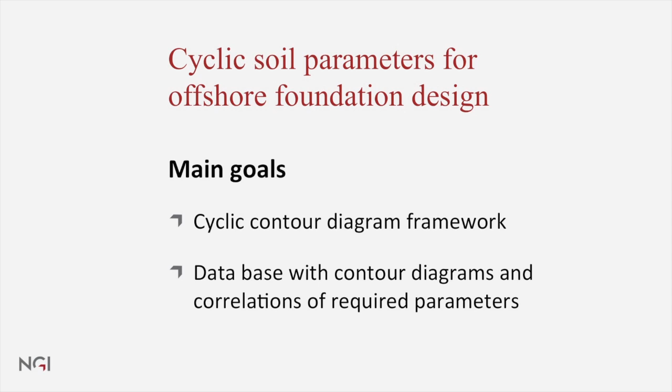The database contains contour diagrams for different soils - sand, silt, and clay - and it also contains correlations of static and cyclic shear strengths, and shear strengths with index parameters. The paper also contains correlations of non-cyclic parameters like static strength, initial shear modulus, friction angles, and consolidation characteristics.

This is the content of my presentation. I will start talking about when do we need cyclic soil parameters, what parameters do we need, how does soil behave under cyclic loading. Then I will explain the cyclic contour diagram framework, how the contours are constructed, what the important parameters are, and also a database with the diagrams and correlations.

I will then talk about how the contour diagrams can be applied in design, calculation procedures, slope stability or slope instability due to cyclic loading like earthquakes, and finally verification of the use of contour diagrams by comparing calculations with measured prototype and model test observations.

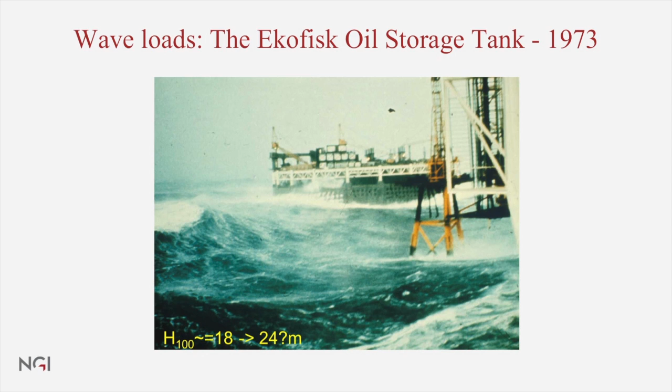So, when do we need cyclic soil parameters? My first involvement with offshore foundation design was in connection with the Ekofisk tank, which was installed in 1973. McClelland engineers were responsible for the site investigations, and they had significant experience from the Gulf of Mexico, and we benefited greatly from their experience at that time.

I did not have the privilege to meet McClelland himself, but I met many of the McClelland engineers, and that gave me a very good start in my career for the offshore work.

After the Ekofisk tank was installed, things happened very quickly, and we got into a very steep learning curve. Already 2 years after the Ekofisk tank was installed, 2 of the large condeep platforms were designed and installed. Also in that period, the industry saw the need to know more about cyclic soil behavior, and 12 industry sponsors initiated a joint industry project on cyclic loading on clay. That was the first joint industry project offshore at NGI, and we have had many more after that.

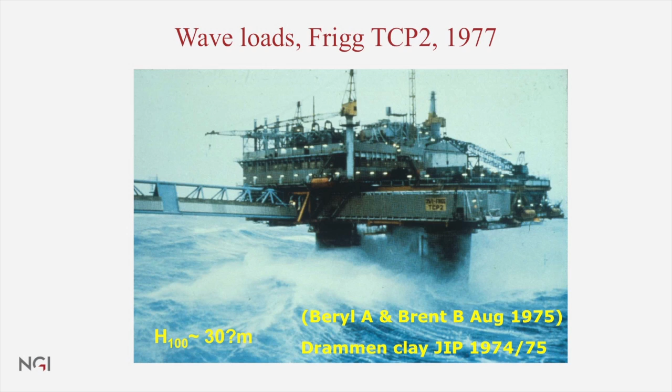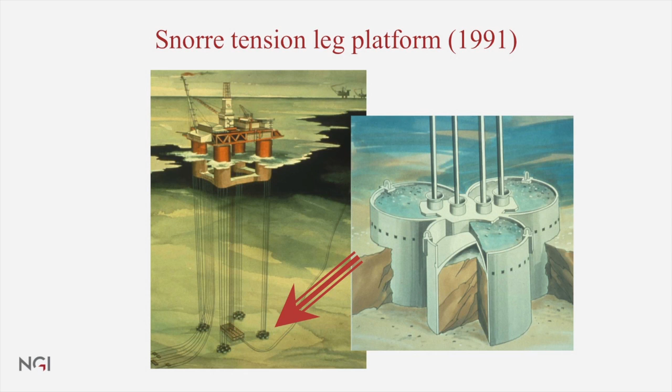But we need to know cyclic soil behavior not only to design the large gravity platforms, it's also important to know cyclic soil behavior in connection with other foundations, like foundations for TLPs, anchoring, suction anchors for other type of floaters.

More recently, it's also required in connection with the foundation design of wind power structures. They pose additional challenges, both because of the new, or at least partly new, type of foundations, but also because they are placed closer to shore. It means that we get into more complex soil conditions with more layering and varied soil - sand, silt, and clay of different densities.

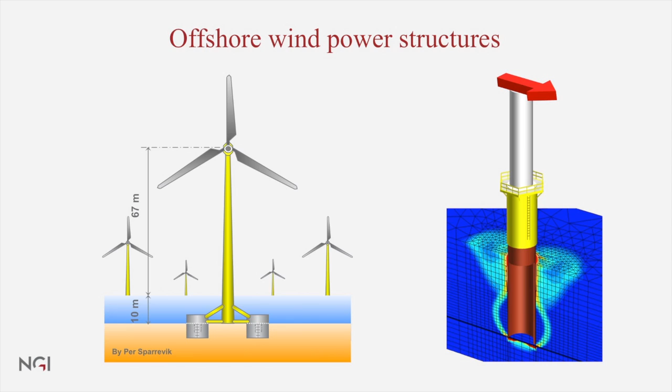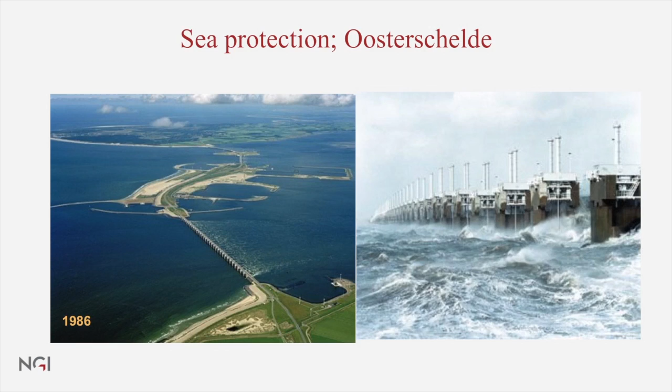It's not only offshore that we need soil parameters for cyclic loading. It's also in connection with sea protection barriers, coastal structures, ice loading from drifting ice, and this will also be very important, of course, if the industry goes into the Arctic.

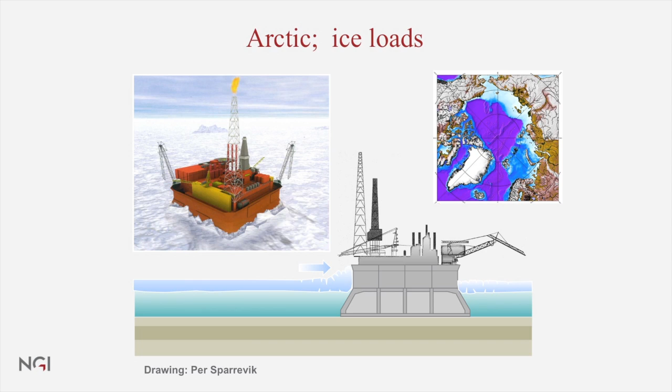Also in connection with earthquake, cyclic soil behavior is important, both in connection with the bearing capacity of structures during earthquake and also for instability that can be induced by earthquakes.

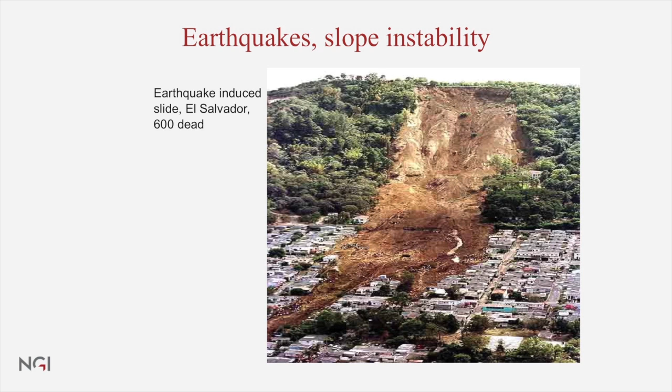In order to make sound foundation design for cases with cyclic loading, we need to address the topics that I've listed here. We need to determine bearing capacity under cyclic loading. We need to calculate cyclic displacements. We need to determine soil stiffness for use in global dynamic analysis.

We need to calculate permanent displacements due to cyclic loading, both due to dissipation of excess pore pressure that is generated, and also due to the increased average shear strains during cyclic loading. Soil reactions will also be influenced by the cyclic loads, which may cause redistribution of reactions. Finally, we need to determine how the static capacity is reduced by cyclic loading.

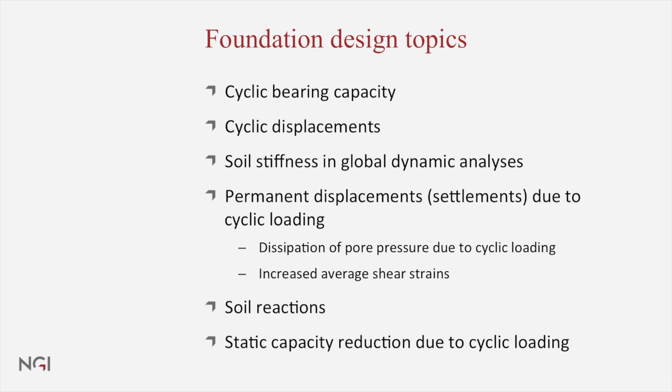So what parameters do we need in order to address these topics and to make design for this? We need cyclic shear strength, cyclic shear modulus, permanent shear strain due to cyclic loading, pore pressure generation, recompression modulus to calculate the volumetric strain when the pore pressure dissipates, damping, and static strength reduction due to cyclic loading.

All these topics are covered in the written version of the paper, but today I will concentrate on the 4 first ones.

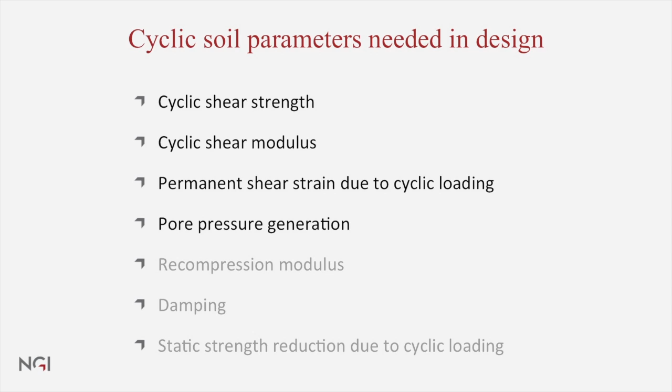Before we determine the soil parameters, it's important that we understand what is happening to the soil when it is subjected to cyclic loading. I've illustrated that here by an effective stress path, which shows the behavior for a test with monotonic loading on a contractive soil. This is undrained behavior.

You see that the stress path will go like this. It will reach a peak, and then it will reach the failure envelope, and it will then experience strain softening as it's going down along that failure envelope.

For cyclic loading, where we cycle with the cyclic amplitude around an average shear stress, we also start here, and during the first quarter cycle we go up here. But when we then reverse, we get an effective stress path that forms a loop. And this loop does not close. So it means that after one cycle, we have generated a permanent pore pressure.

And this pore pressure will accumulate or increase with number of cycles, and we move to the left in this diagram. The effective stress path will finally reach the failure envelope, and large shear strains will then develop.

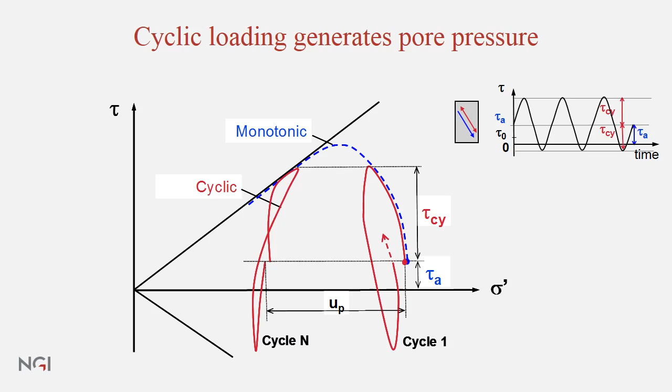This is illustrated in another way in this diagram. It shows how the pore pressure develops with time. As I said earlier, that pore pressure will increase with number of cycles, and therefore also with time, both the cyclic amplitude and the permanent pore pressure.

This means that the effective stresses goes down, and therefore the shear strains will also increase with time. Both the cyclic amplitude and the average shear strain and the permanent shear strain.

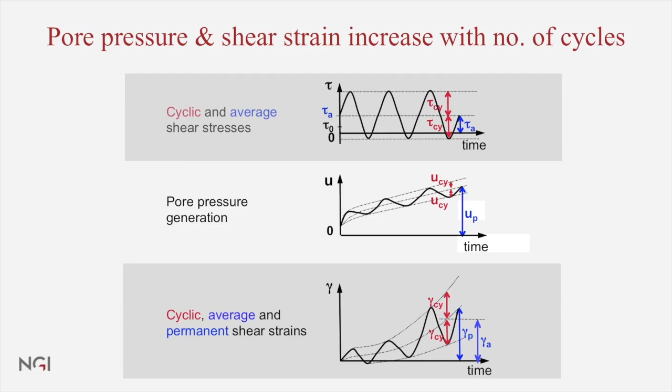I explained these components more clearly in this picture. This is a stress-strain behavior after the first cycle and after a cycle N. The cyclic shear strain is then defined as half the difference in peak-to-peak shear strain. And the average shear strain is half the sum of the peak-to-peak shear strains.

The gamma p is the shear strain that will be there when we have completed the loop, so that after we have completed the cyclic event, we will sit with a permanent shear strain, gamma p.

We need these shear strain components in order to calculate cyclic displacements and the soil stiffness for dynamic analysis. We need gamma cyclic for that. We need the sum of gamma A and gamma cyclic in order to calculate the total or maximum displacements. And we need the gamma P to calculate what the shear-induced displacements will be when the cyclic event is over.

These do not describe what is happening within the loop, the details of the loop, but we have developed a model where this also can be described, and that's described in a paper to this conference by Amir Kaynia and myself.

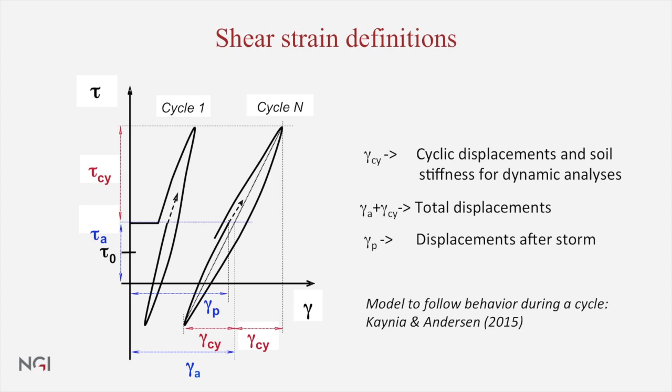So, in order to determine these components, we need to perform laboratory tests. This shows the results of 3 such laboratory tests that we run in order to determine these components.

The first one is a cyclic simple shear test with symmetrical cyclic loading. And you can see here the response. It's a reasonably symmetrical cyclic shear strain development. If you perform a triaxial test, also with symmetrical cyclic loading, you will see that the behavior is different.

We get relatively large cyclic displacements, but in addition, we get a permanent or an average shear strain, which is of the same order of magnitude. And it's also going to the extension side.

The reason why it's going to the extension side and that it's not symmetrical is that the soil behavior is anisotropic. The extension strength is lower than the compression strength. So with a symmetrical cyclic loading, we mobilize a larger part of the strength on the extension side than on the compression side. And therefore we get this non-symmetrical behavior.

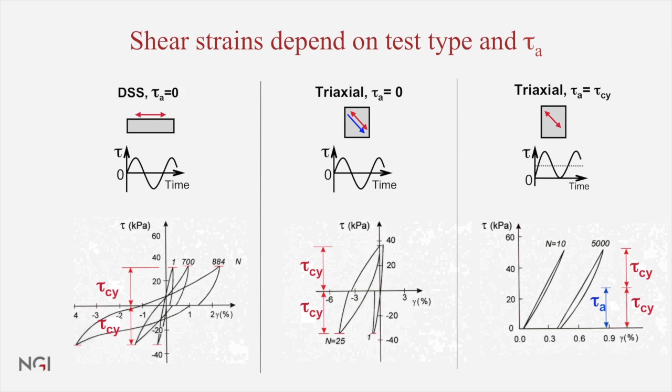This shows another aspect. It compares triaxial tests which have been performed with the same maximum shear stress, but with different amplitudes. And if creep should be the explanation for the development of shear strains during cyclic loading, the amplitude shouldn't mean very much. But these examples show that creep is not the only explanation, at least, for what is happening during cyclic loading.

The first example is a two-way cyclic loading, and that test failed in 10 cycles with large cyclic shear strains.

Test number B was a one-way cyclic test with the same maximum shear stress but a lower minimum stress. That test survived 2,500 cycles, and at the end it had a permanent shear strain of 0.8% and a cyclic shear strain of 0.3%. The last test had a smaller amplitude and also survived 2,500 cycles, but the shear strains were only 1/10 of test number B.

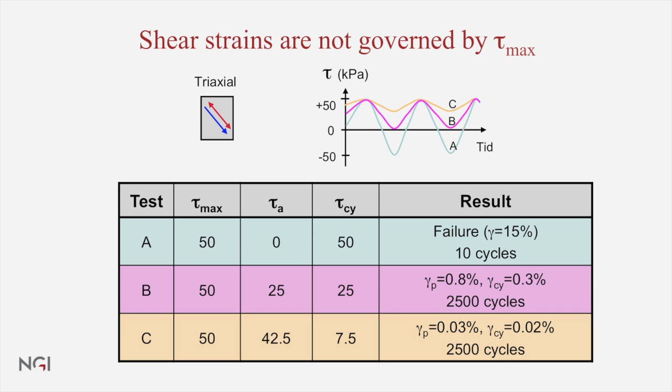In foundation design, or in most foundation design, we have a lot of different stress paths. This is one example where you can see we have both symmetrical and non-symmetrical DSS tests, and triaxial compression tests on both the compression and extension side with different average shear stresses. So we need to organize the results from these different tests so we are able to apply them in design and determine the parameters needed.

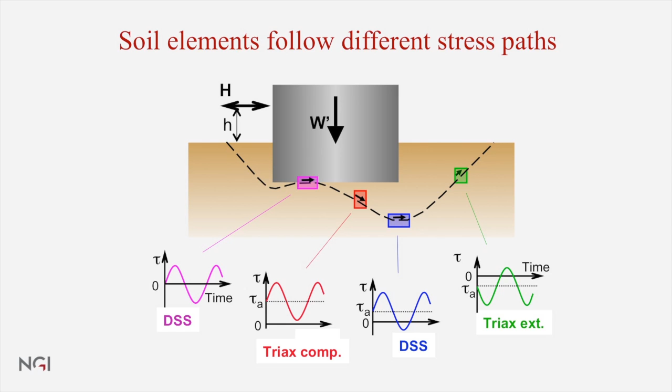One way to do this is the cyclic contour diagram framework. In constructing these diagrams we use the philosophy that since behavior depends on both test type and average and cyclic shear stresses, we develop separate diagrams for DSS and triaxial tests, and we plot the results as functions of the average and cyclic shear stresses.

This shows the results of tests with different combinations of average and cyclic shear stresses. The numbers written along the various data points are the number of cycles to failure and the average and cyclic shear strains at failure.

When we have these results, we can draw contours through the data points. If it's a homogeneous clay with little scatter, you are able to establish contour diagrams like this. The curves show the number of cycles to failure as a function of the various combinations of average and cyclic shear stresses.

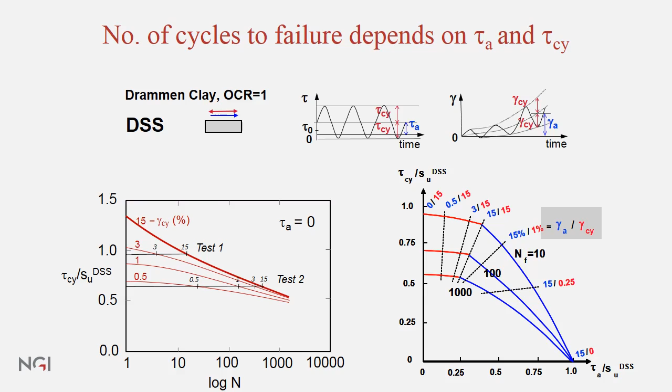We can do exactly the same for triaxial tests, running tests at different combinations and drawing contours. The contours are not symmetrical because this soil, Drammen clay, is anisotropic, so you have the compression strength here and the extension strength here. In this diagram, the failure mode will be large cyclic shear strains in this part, large average compression strains in this part, and large average extension strains in that part.

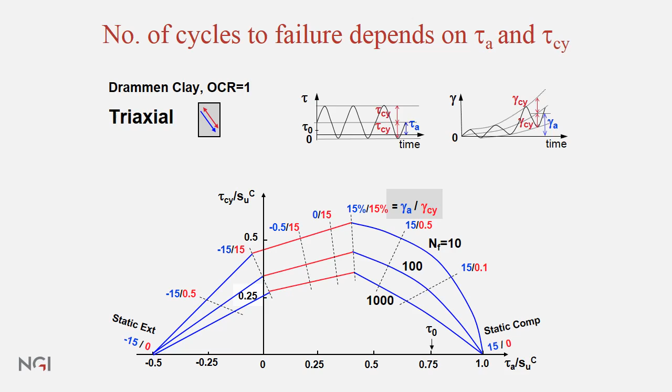When we perform a stability analysis, we need the cyclic shear strength. The maximum shear stress we can mobilize is the sum of the average and cyclic shear stress components. So what we need is the sum of these, and we can easily convert this diagram into one with the same horizontal axis, but with cyclic shear strength on the vertical axis, established by going in for various tau A values, reading out tau cyclic, adding them, and plotting them here.

The diagram may have a shape that is a little surprising, since we have the static strength here, and you can see that for one cycle we can actually apply a cyclic load where the strength is actually higher than the static strength.

The reason for this is that we perform the cyclic tests with a load period of 10 seconds, and the reference static strength is from a test brought to failure in approximately 2 hours. So that's why we have this shape of the diagram, showing that we can apply higher shear stresses under cyclic loading than under static.

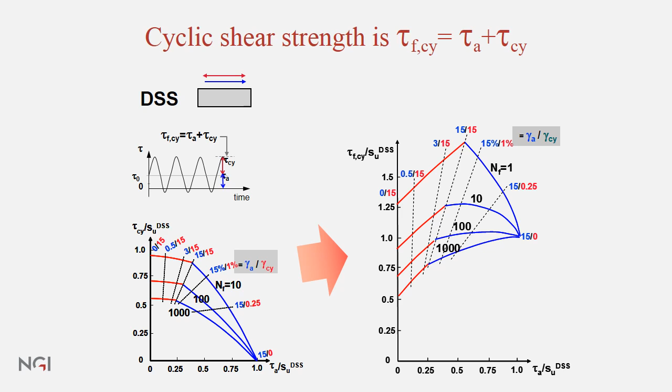But of course this is related to the load period, which is 10 seconds in this case, and the rate of the static test, so we need to keep that in mind. If we have different conditions, such as a different duration of the average load or a different load period for the cyclic loading, we need to make some adjustments. I'll come back to the effect of load period later.

We do the same for triaxial. It's one step more complicated because we have a compression strength here. Then we add tau A and tau cyclic, and we get this diagram. But we also need to consider what is the extension strength, and then we are on the opposite side. So the strength will be the difference between tau cyclic and tau A.

And we get this discontinuity for the triaxial strength. We have defined compression strength when you have an average shear stress which is 0. That's the difference between compression and extension. When we have a positive average shear stress, we define this as compression. When it's negative, we say that it will fail in extension. So that's the reason for this discontinuity.

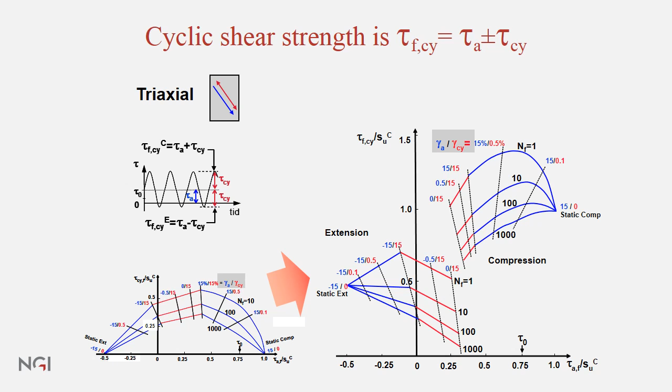But we need also information about the strains, not only the strength. And we follow the same philosophy and plot the data from the tests. This is the strains, average and cyclic, after 10 cycles. And it's plotted in the diagram just as we did for number of cycles to failure. And we can draw contours just like we did for the strength.

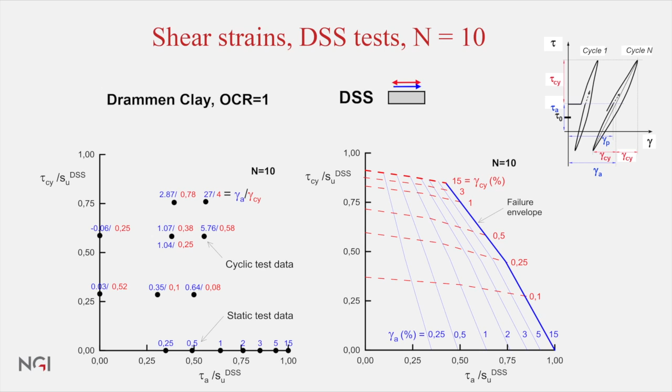We have the red curves indicating the cyclic shear strain. The blue are the average shear strains. We need to do this for different numbers of cycles, and this shows for 10 cycles, this shows for 100 cycles.

Again, the diagram that perhaps many of you are familiar with and which has been used for many years. This is valid for an average shear stress of 0, so it's a two-way cyclic loading. This diagram is connected to these contours. As tau A is equal to 0, the n equal to 100 will be data points along the vertical axis here, and it's also data points along this section for n equal to 100. And the same for n equal to 10, data points here and here.

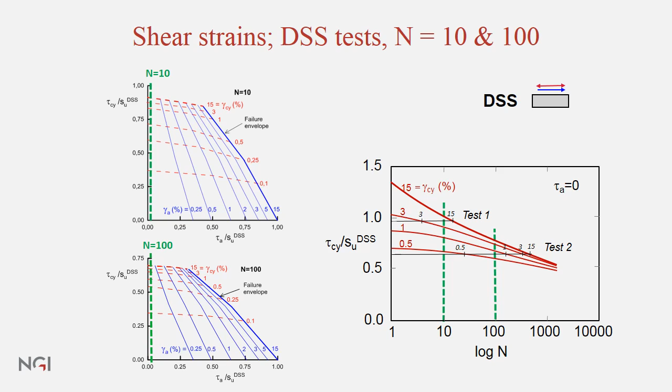And we can actually combine these different contours, both with the number of cycles to failure, shear strains, and log n diagrams into a three-dimensional plot like this. It's illustrating the behavior, but it's more difficult to apply in design, but this is the connection between these different contour diagrams.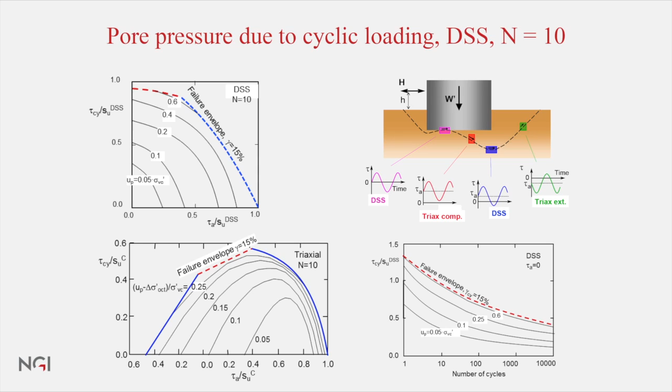These contour diagrams can be used for several purposes. One is to use them directly in design, which we often do, and I'll come back to that. They also provide a good basis for developing more sophisticated constitutive models. And also, I think when you have a constitutive model, to reproduce these diagrams with your constitutive model would be a very good check of the quality of your constitutive model.

They also provide a good framework for planning and interpretation of site-specific cyclic laboratory tests when you come to a new site. And I'll also come back to that. So as you understand, at NGI we use these contour diagrams for many purposes.

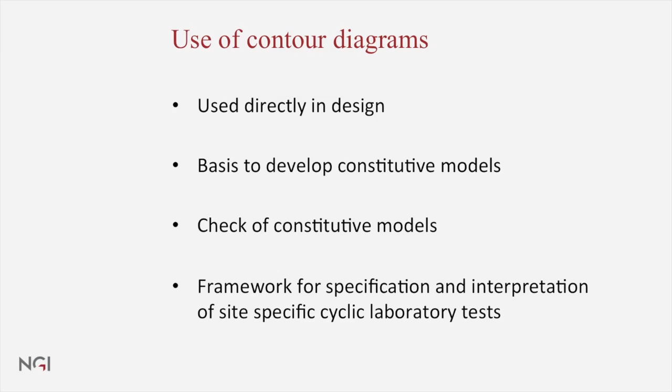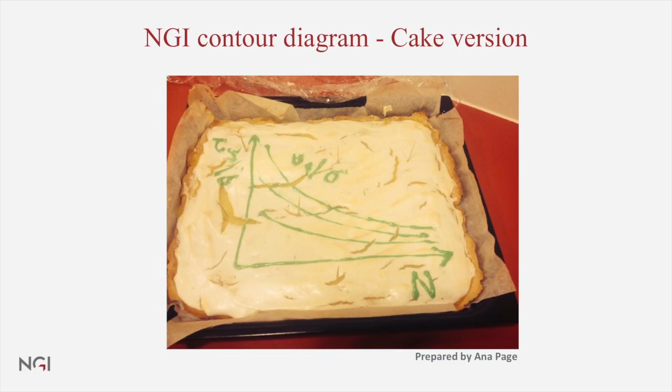And it also includes cake decorations. And we also, as I guess Philip was not aware, but we also used them to put some science into sports. And this is our basketball version.

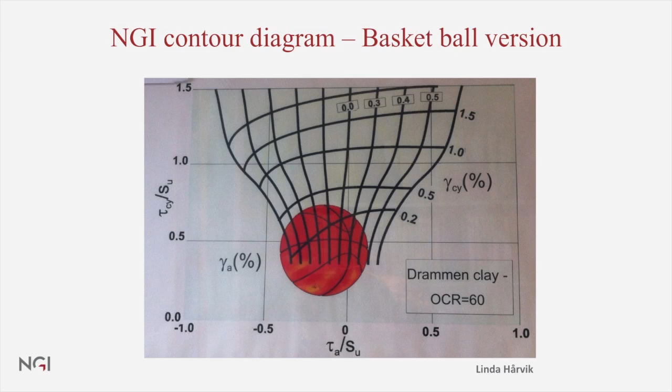When we construct these diagrams, there are some parameters that we need to keep in mind. And there are 4 of them that I would mention today. One is the difference between stress and strain controlled cyclic loading. The other is effect of load period, and then preshearing, and the difference between, or the effect of applying it drained or undrained.

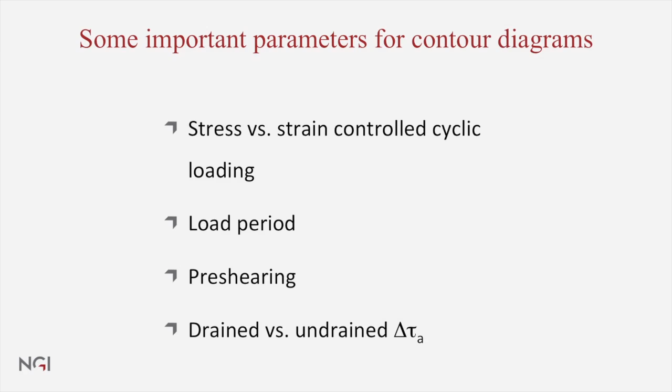The contour diagrams that we normally establish or construct are based on stress control tests, meaning that we perform tests at a constant cyclic shear stress amplitude and determine the strain contours based on that. In offshore engineering, one reason for doing that is that normally we work with designs where the loading is in terms of specified forces and a load composition where we know the forces. And it's much more easy to relate that to shear stresses than to shear strains.

So I think that's one good reason to work with stress-controlled cyclic loading. For earthquake engineering, it may be a different story because the loading is defined in different ways. And earthquake engineering very often uses strain control tests. But it's important that we are aware of the difference between these.

I have one example here where I have the result of a strain-controlled test with a strain amplitude of 1.5%. You can see that it plots very differently from the strain contour for 1.5% from the stress control tests. The simple reason is that after 100 cycles, the strain control test has been subjected to 100 cycles at 1.5% shear strain, whereas the stress control test has 1.5% shear strain only in the last cycle, starting with 0.5% and building up. So it's a much more severe cyclic loading if you perform strain control tests than stress controlled. That's important to keep in mind.

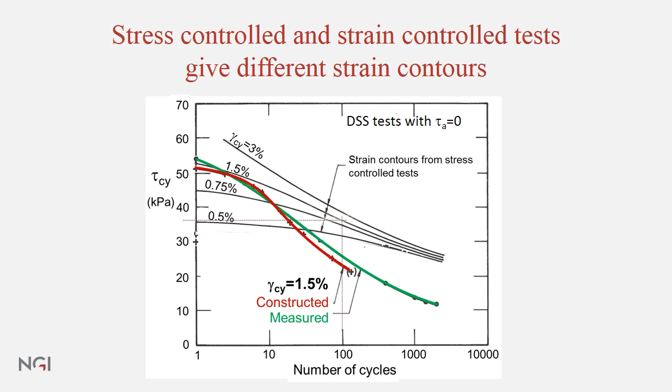We are able to determine the behavior of a strain control test based on the strain contours from stress control tests, as you can see with the red curve here. That has been constructed by the strain accumulation procedure, which is described in the paper, and I will also come back to that.

This shows the effect of load period. It's the load period on the horizontal axis, and it's the number of cycles to failure divided by the number of cycles to failure for a 10-second load period. This diagram shows that with 10 seconds set equal to 1, if we have a 1-second load period, we can actually apply something like 5 times as many cycles before failing. If we have a 100-second load period, there is significant scatter, but typically we could apply only 1/5 of the number of cycles compared to 10 seconds.

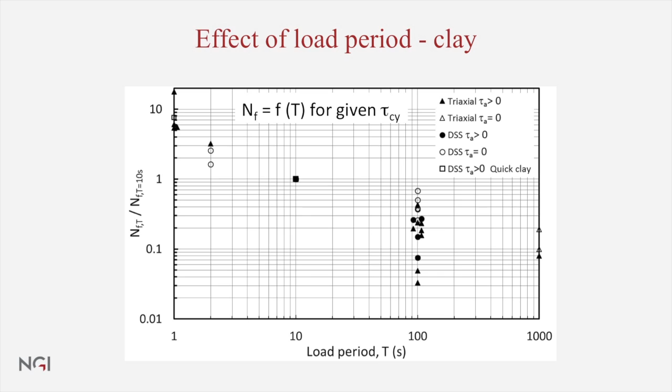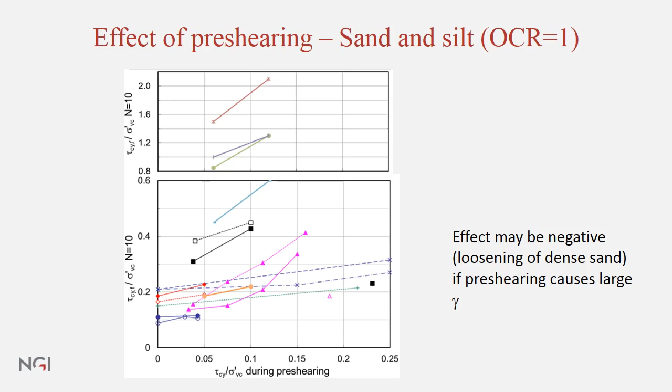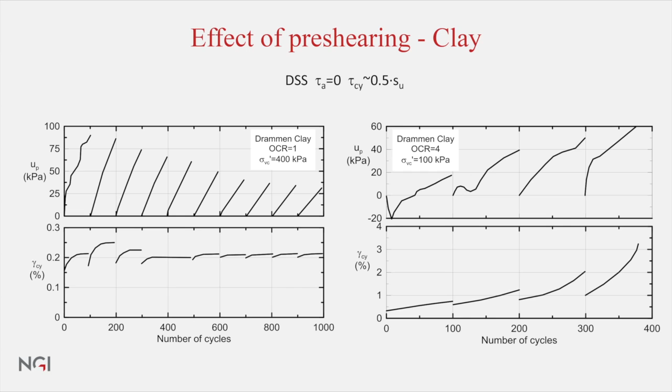So there is clearly some degradation of over-consolidated material that we should be aware of. For gravity platforms, this may not be so important, because gravity platforms are normally designed by assuming that the design event comes just after installation. And when we have cyclic loading or dissipation of the pore pressure, it means that at the same time we get an increased effective stress due to consolidation under the weight of the platform, which will compensate for some of the pore pressure buildup.

If we have a monopile, for instance, we may need to be more careful, because there, on the sides, we do not have the beneficial effect of increased effective stresses due to the weight with time.

The last of the parameters I wanted to comment on is the importance of whether the average shear stress is applied drained or undrained, or it's actually the change in average shear stress. I've illustrated that by two load histories: one where the average shear stress increases quite rapidly, and one where it increases more gradually. For clay, the soil will be undrained during application of Δτa. But for sand and silt, the soil may be undrained or drained depending on whether Δτa is increased rapidly or slowly. Most likely it will be undrained during this type of loading, but drained under this type of loading. Whether it's drained or undrained will depend also on the drainage path, the dimension of the structure, and the consolidation characteristics.

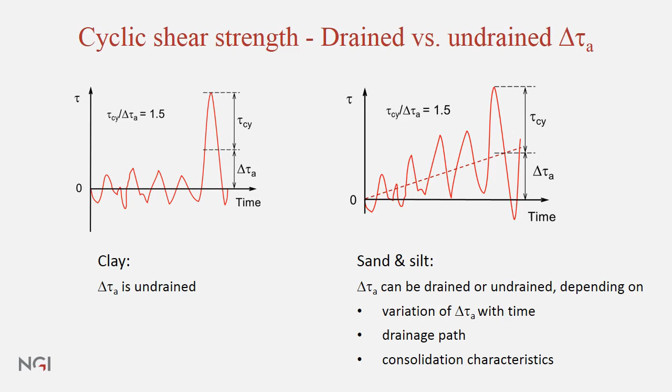But the implication for the cyclic shear strength is quite significant. This shows the diagram if we apply the average shear stress undrained, and this if we apply it drained. As you can see, the strength is much higher for the undrained application than for the drained when we come to this part of the diagram. Along the vertical axis, they are the same, because if you have no τa, then they are identical.

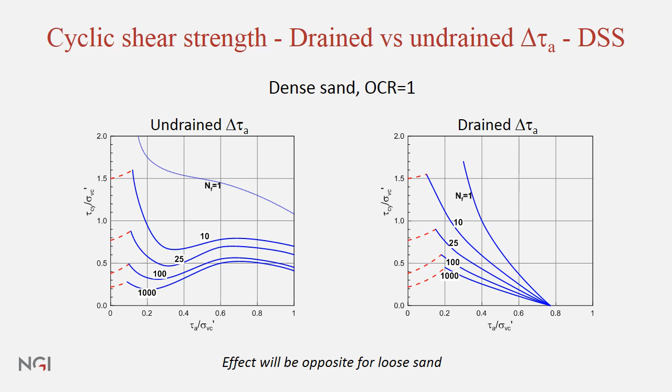We have the same for triaxial. For the triaxial, the intersection points with the horizontal axis represent the static strength, and that will depend on whether we apply the average shear stress by changing the vertical stresses or the horizontal stresses. They will follow different drained effective stress paths, and therefore you get different drained shear strengths for these cases. As you can see, the diagrams are very different.

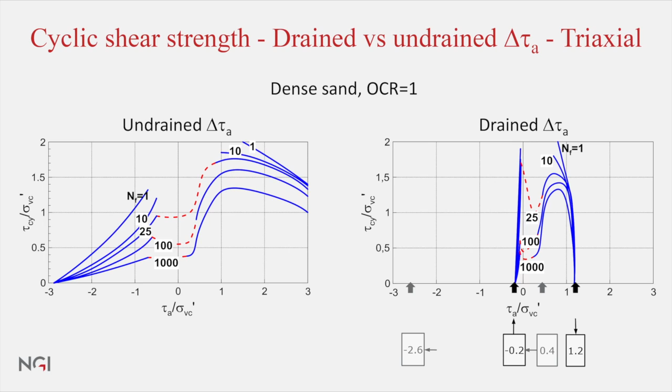I have tried to put some numbers on what the effect can be, using an example where I assume a ratio between cyclic τ and the change in average shear stress of 1.5. Then I read out the shear strength for extension and compression and DSS—not shown here, but done in the same way—both for undrained and drained cases. Then I calculate the ratio between drained and undrained cyclic strengths. It depends on the type of test, but the average ratio is that the drained strength is 65% of the strength where Δτa application is undrained. The strength is undrained because the cyclic loading occurs under undrained conditions in both cases.

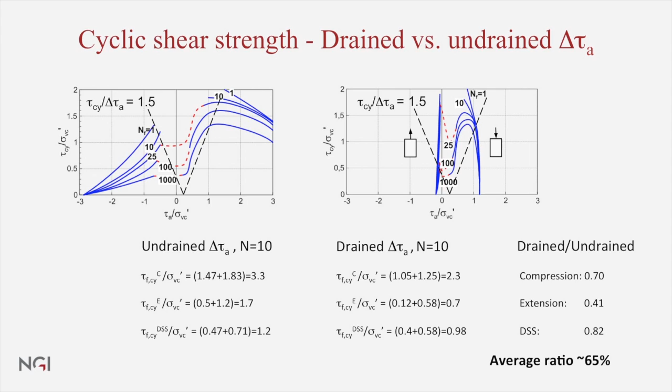If we just look at an example of what this could mean: if you look at a pad that is in tension and one that is in compression, and assume that the strength along a potential failure surface is the average of the three, you will see that the ratio between the strengths for drained Δτa and undrained Δτa is as low as 0.3 for the tension case and 0.83 for the compression case. This is for a very dense sand, for 10 cycles to failure, with a ratio of cyclic τ over delta τa of 1.5. If the density goes down, the effect will go down. But if we reduce this ratio, the effect will be even larger.

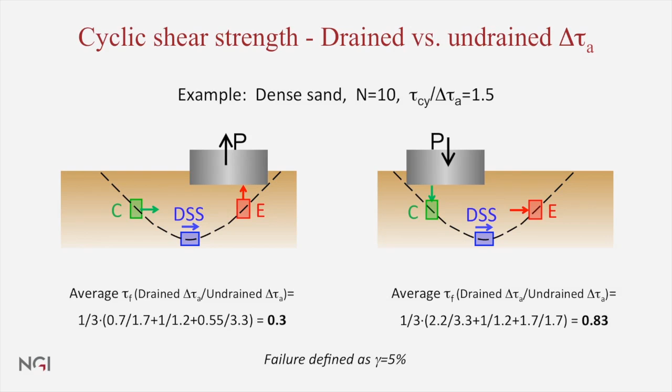So when we do a design, it's very important for us to get good information about the cyclic load history, because that can have very big consequences for the foundation design.

I will now show you some examples of the database that we have in the paper. This database can be used directly in feasibility studies, and it can also be used to establish site-specific contours.

Our strategy to construct site-specific contours or to apply the database would be that we first try to find contour diagrams in our database from soils similar to the ones we want to investigate. Then we could run some monotonic tests, DSS, triaxial compression and extension, and a few cyclic tests with different combinations of average and cyclic shear stresses, and compare to the diagrams in the database. If we get a good match, we can be happy and use that.

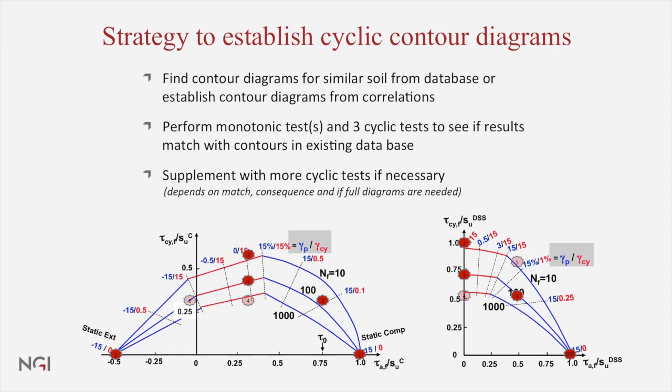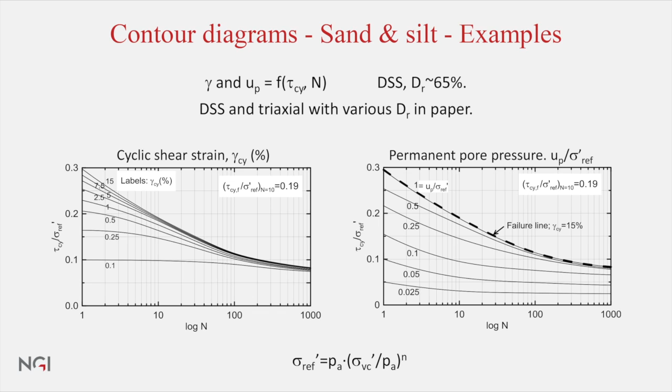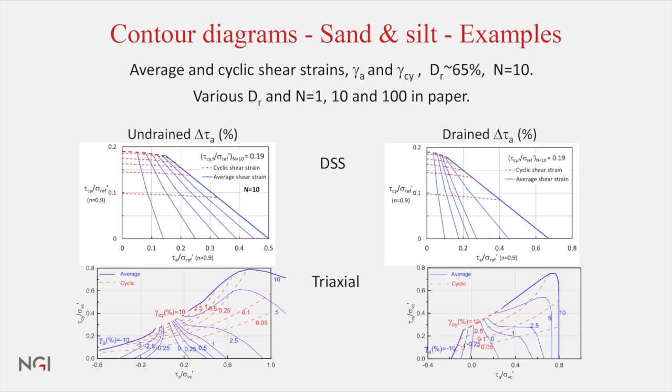The paper also gives various correlations that can help construct the diagrams, for clay, silt, and sand. At least for clays, or in general, we need the static strength, since that defines the intersection at the horizontal axis. Also, diagrams for clay are normally normalized with respect to the undrained static shear strength, so we need it to denormalize our diagrams.

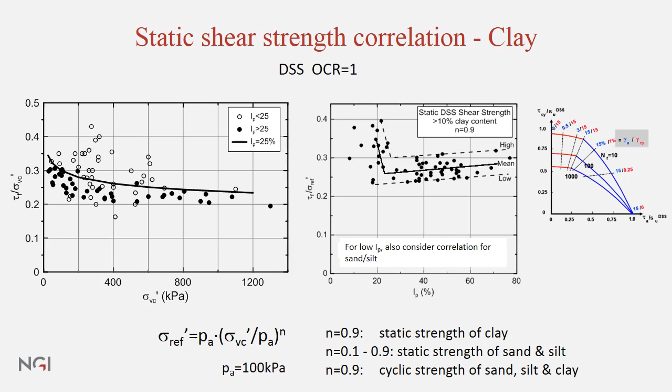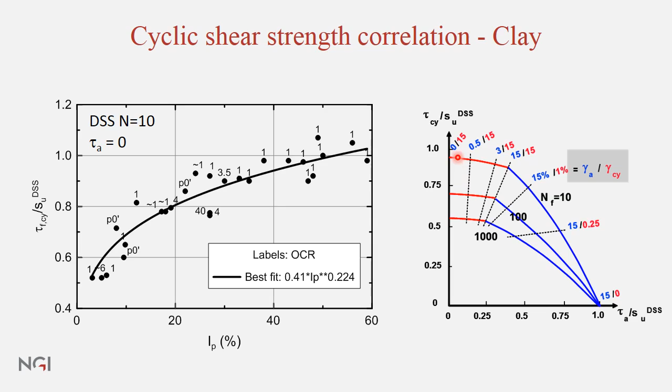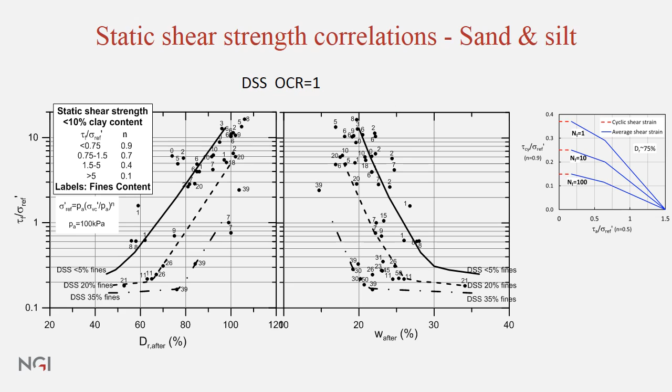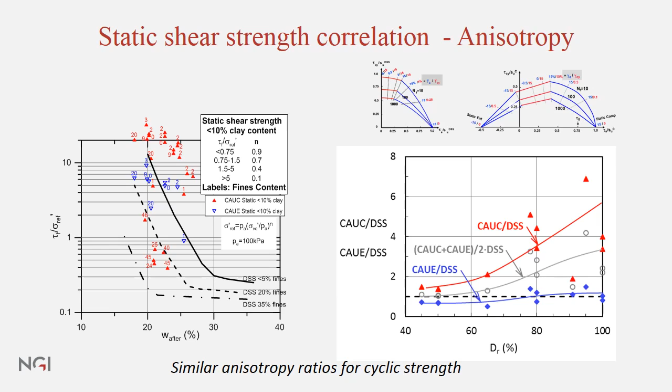We need these data to determine the intersection point here, and I didn't mention it, but for the static strength, of course, gives us this intersection point on the horizontal axis. The exponent for this sigma ref that I use for normalization is 0.9, which seems to give a reasonable fit with our data.

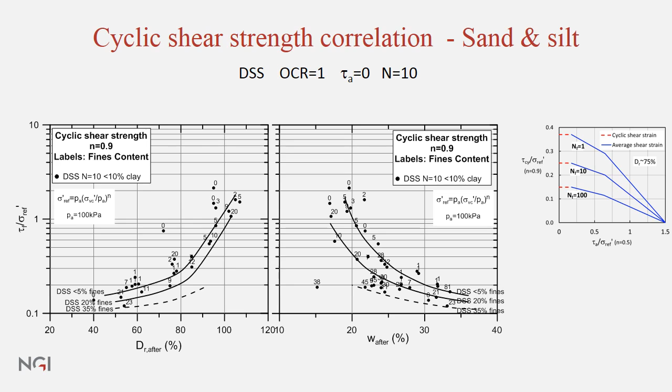The cyclic data or the cyclic strengths I've shown you are for 10 cycles. That's not a magic number, but it's convenient to use for these diagrams. You can then use this plot if you want to find out what is your cyclic strength for other numbers of cycles.

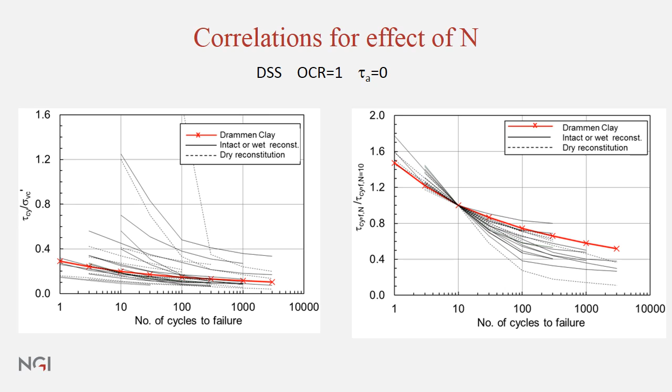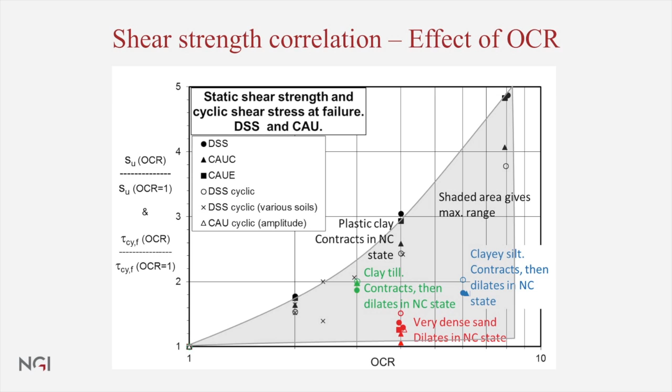The next topic is how do we apply these contours in design? In a real design situation, we normally have a storm where the average and cyclic shear stresses will vary from one cycle to the next, whereas our contours are based on tests where we have a constant average and cyclic shear stress for each test.

So we need to transform the storm into an equivalent number of cycles of the maximum wave that gives the same effect as the irregular cyclic history. We have procedures to do that: the pore pressure accumulation procedure and the strain accumulation procedure. I think they are both applicable and can be used.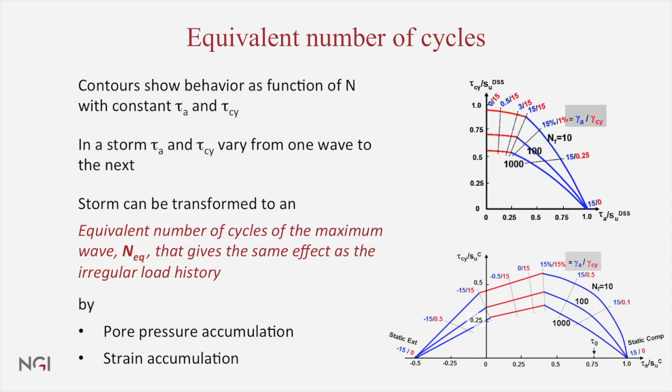There is no time for me to go into details on these procedures, and I will have to refer you to the written paper, but you will find them there. They are also to some extent published earlier, but there are some additions and refinements in the paper compared to previous publications.

But when we have determined the equivalent number of cycles, we can determine strengths and deformation properties. One piece of information we need in order to do that is where are we in these diagrams? We need to determine what is the combination of cyclic and average shear stresses, because that will determine where we are in these diagrams.

One simple assumption is to say that the ratio between cyclic and average shear stresses is the same as the ratio between cyclic and average loads. I've shown an example with that here, where we would be along a 45-degree line in the DSS plot, along the dotted line on the compression side in Triaxial, and here on the extension side.

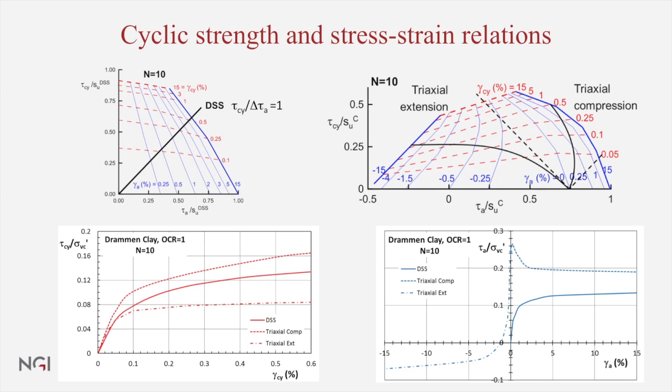A more sophisticated and accurate procedure is to implement the contour diagrams into the finite element programs and let the program find out how it is, what path it wants to follow, by having strain compatibility and equilibrium between stresses and forces. There are two finite element codes that have been developed by Hans-Petter Jostad at NGI. One is based on undrained conditions during the whole storm, and one takes the effect of drainage that may occur during the storm into account. Hans-Petter will present the result of one of these programs in a keynote lecture tomorrow.

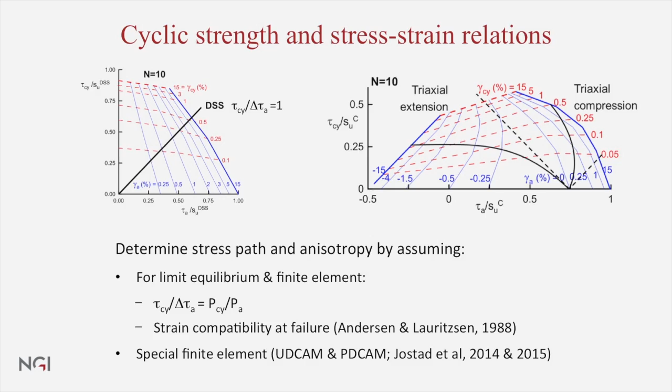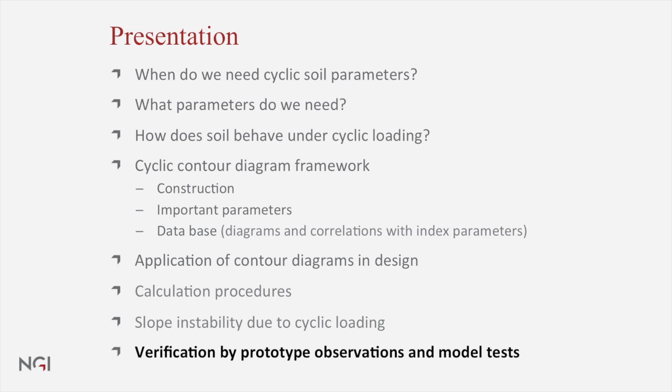The last item on my agenda today is to show you some examples where we compare calculations done with this framework with prototype observations and the results from model tests. I will present three cases: one for a consolidated clay, one for a very dense sand, and one for a very soft clay. There are also other examples in the paper that you can study if you want to.

The first example is the Condeep Brent B platform, which was heavily instrumented, where there was a quite significant storm the second winter after installation, with a significant wave height of 10.3 meters. The accelerometers gave us information; by double integration of these, we got the displacements during the storm. The cyclic horizontal displacement is plotted here, and the horizontal load on the vertical axis.

The red curve and points are the rotations, and the blue curve and points are the horizontal displacements. The rotations are given here, by the way. The moment and the cyclic rotations are given on the other axis. As you can see, the ratio between calculated and measured values are in reasonable agreement. It's not a perfect match, but the calculated rotations were 6% greater than measured, and the calculated horizontal displacement was 70% of the measured.

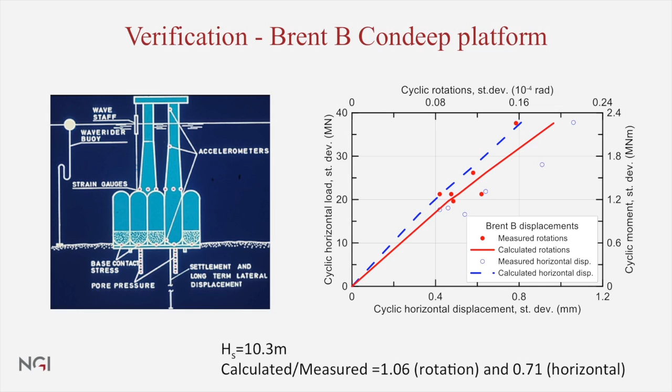The second example is a centrifuge test on a very dense sand, and it's a platform which actually is very close to the Ekofisk tank. The dimensions are the same, the water depth is the same. It's also very dense sand, but it's not Ekofisk sand, it's another sand.

The test was performed by applying a storm similar to the design storm for the Ekofisk tank, where we have included load and material coefficients. The characteristic horizontal load is 786 meganewton. So this is where we would be at the predicted failure for the Ekofisk tank.

This plot shows the horizontal displacements on this axis and the horizontal load on the vertical axis. Since we did not get failure, we had planned to increase the storm by 50% and apply that storm again after the first storm, and also to increase the storms if we did not get a failure, because we were aware that we probably would not get failure. So we had prepared for that.

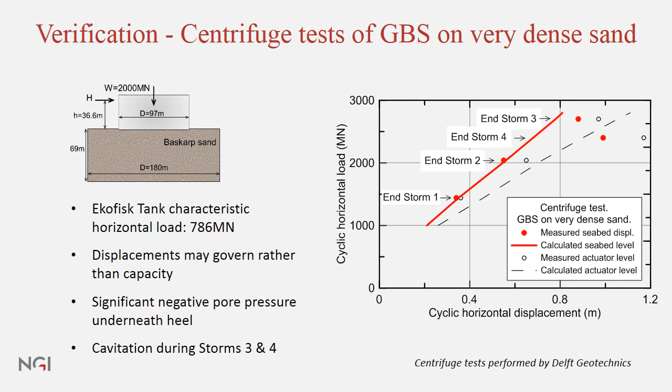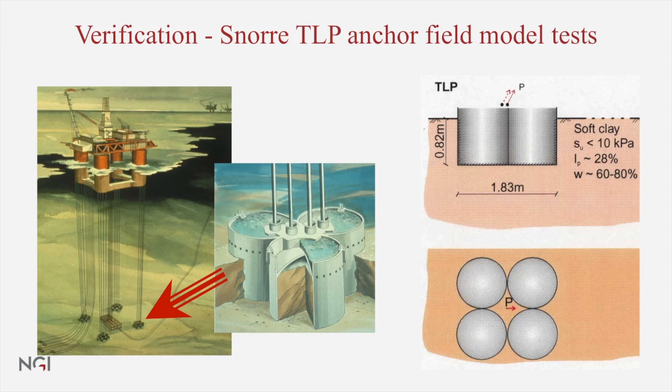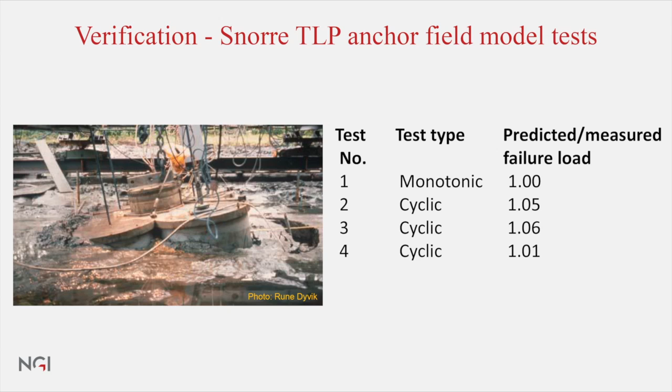You can also see the cyclic displacements compared to the predicted ones, which we are very happy with.

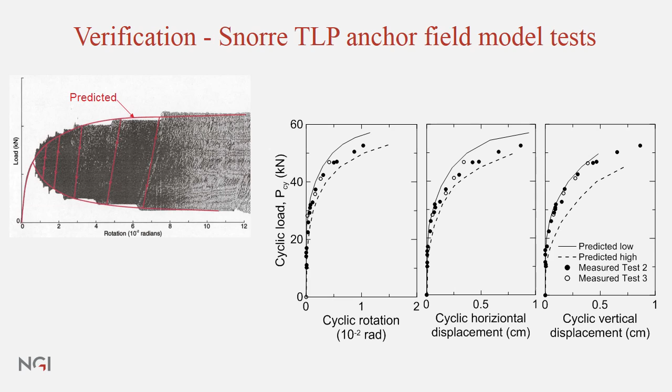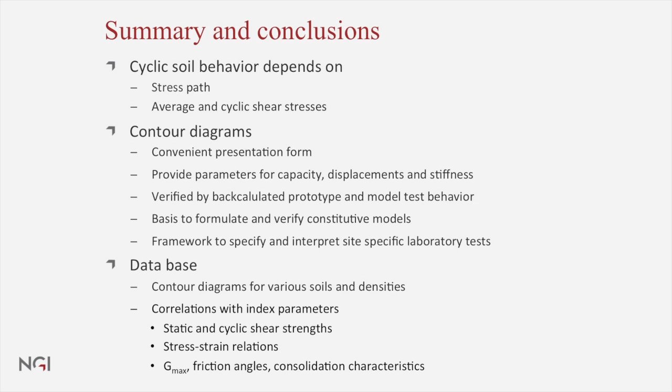We have also contour diagrams for various soils and densities. We also have correlations with index parameters, static and cyclic shear strengths, stress-strain relations, and also non-cyclic soil parameters like the initial shear modulus, friction angles, and consolidation characteristics, which may also be useful for other purposes than cyclic loading.

The work that I presented is based on more than 4 decades of research and project work at NGI, and it has been done in cooperation with a large number of NGI colleagues, and it has been a very pleasant cooperation. It has also been a cooperation with colleagues in the industry, which has been very inspiring and rewarding. It has not least helped us to identify needs and challenges that we have and guided the research that we have done.

And also the support of the industry has, together with the Research Council of Norway, been in terms of funding, which of course is also essential for us. So that cooperation is very much appreciated.